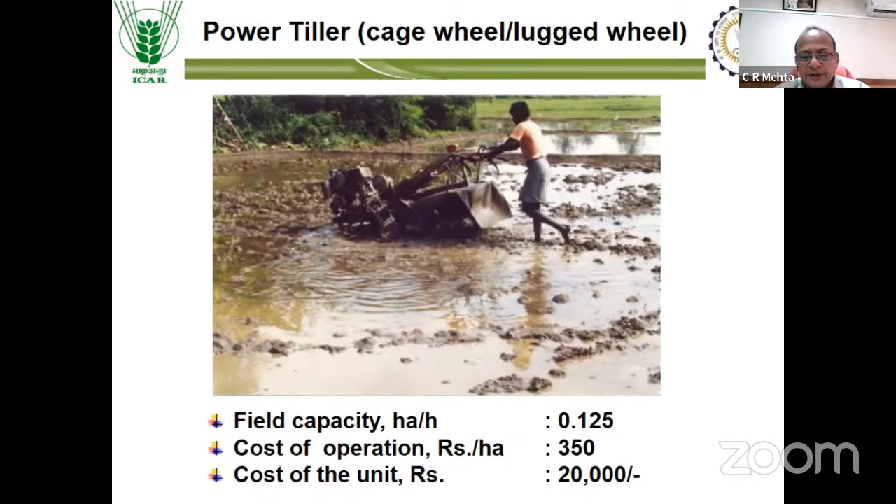Then in major parts of our country, tractor operated rotavator is used for preparation of field for transplanting of rice in lowland areas.

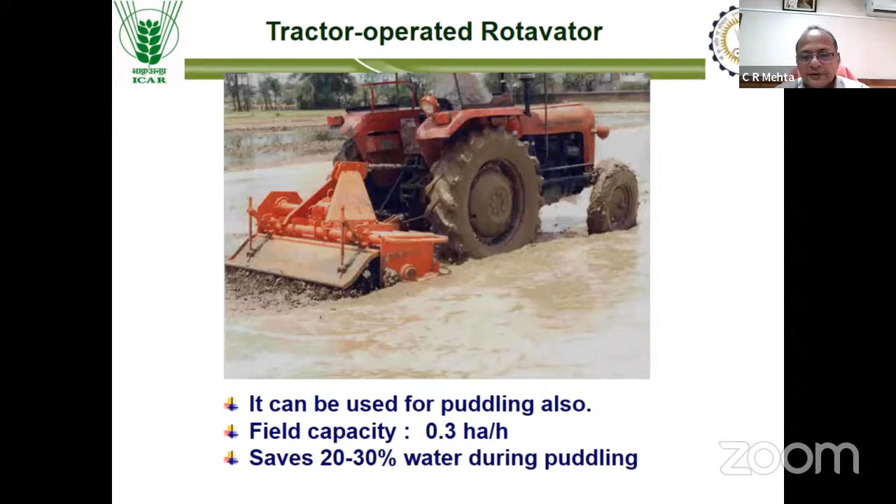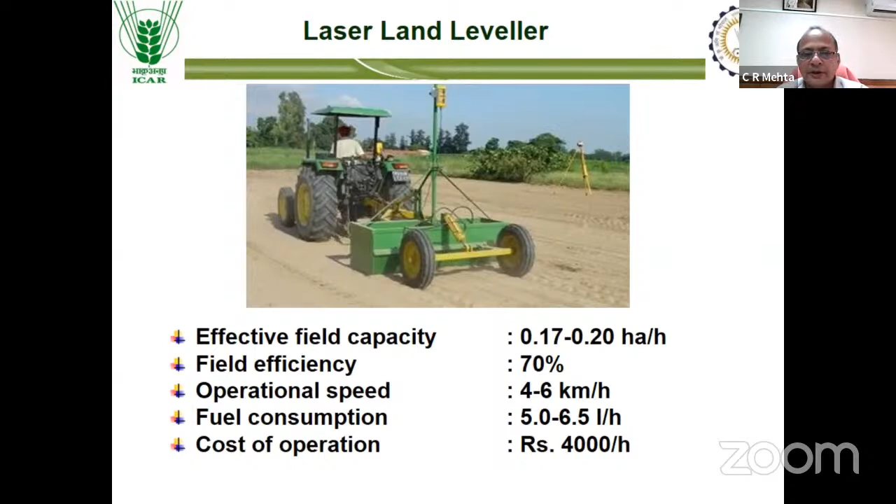Then you may have observed nowadays the use of laser guided leveler for fine leveling of rice fields. That helps in saving irrigation water by around 22 to 25%. Presently, laser guided levelers are popular particularly in the northern part of India, but slowly these are getting popular in central as well as southern parts of India also, and these are being used on a customizing basis.

Recently, we have developed the control level puddling system for puddling of rice fields. You may know that laser guided leveler is suitable for leveling of dry fields, whereas we have developed the control level puddling system for puddling of wet fields. There we are in a position to maintain the depth of puddling as well as the uniform water level in the fields, and that helps in saving irrigation water for cultivation of rice crop. Recently we have licensed this system to Farm Implements Private Limited, a Chennai-based company.

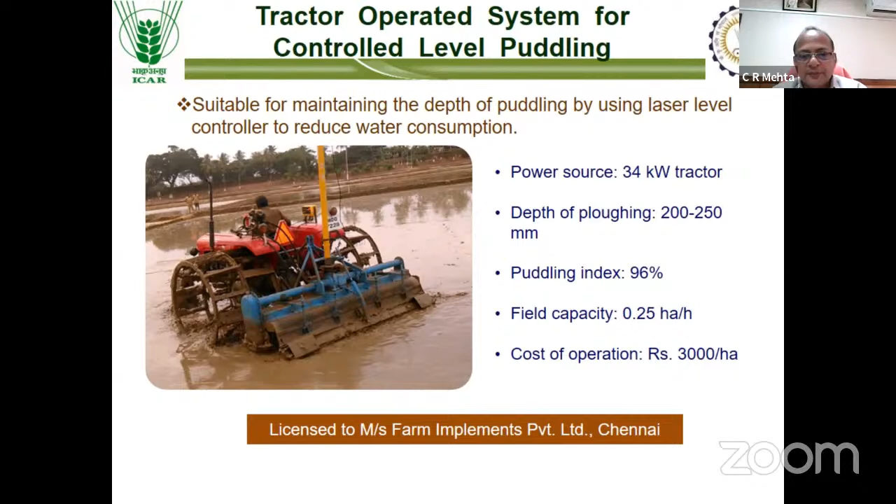Then sowing and transplanting - there are two ways of sowing or transplanting of rice crop in our country. One is dry seeding, another is transplanting of rice seedlings. So for transplanting, still in

major parts of our country, transplanting operation is done manually by women workers, and that involves lot of drudgery. To cover a hectare of an area, women had to insert their fingers in the muddy field around 1.7 lakh times, and that causes skin problems as well as having to work in bending postures, which involves a lot of drudgery. To address that, we have developed manually operated transplanters - 2-row, 3-row, and 4-row - as well as self-propelled transplanters.

So in this slide, you can see the 4-row transplanters.

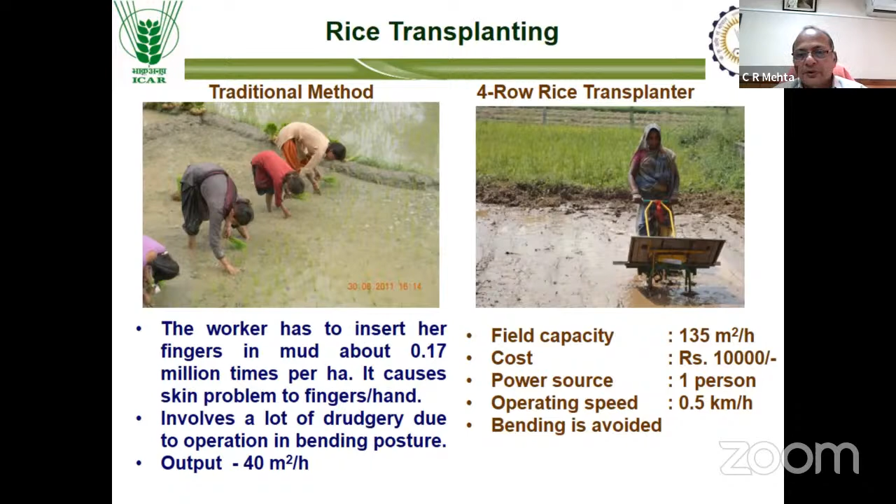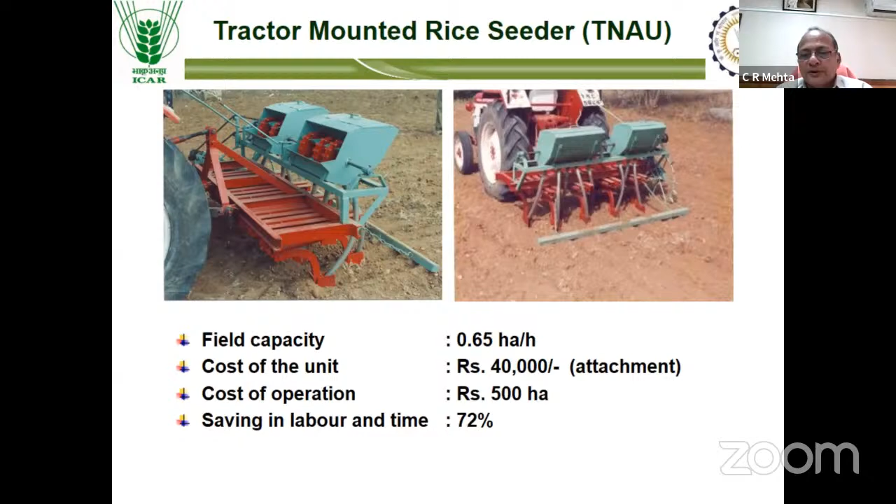For dry seeding of rice, one seeding attachment has been developed which can be mounted on the existing cultivator. It costs only around 40,000, and it has a field capacity of around 0.65 hectare per hour.

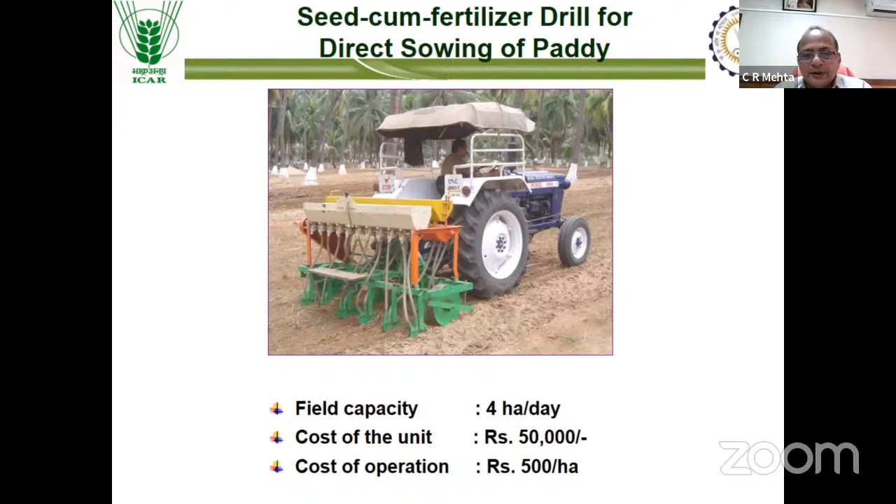You may have also heard that DSR seeders are nowadays available, and those are suitable for direct sowing of paddy. This year we have observed that around 25% of the total area in Punjab has been brought under DSR, direct seeded rice, particularly for dry cultivation, due to non-availability of labor for carrying out transplanting operations, as well as limited availability of transplanters in the state of Punjab.

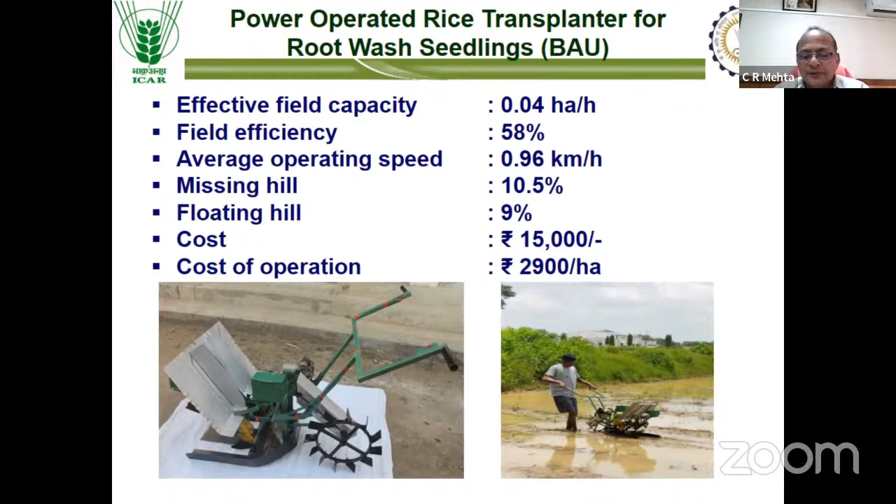Nowadays these are being imported particularly from China, and we have modified it by putting in a motor operated by a battery, so that the workers are more comfortable, because earlier that was operated by a cranking mechanism. It costs around 15,000 to 25,000.

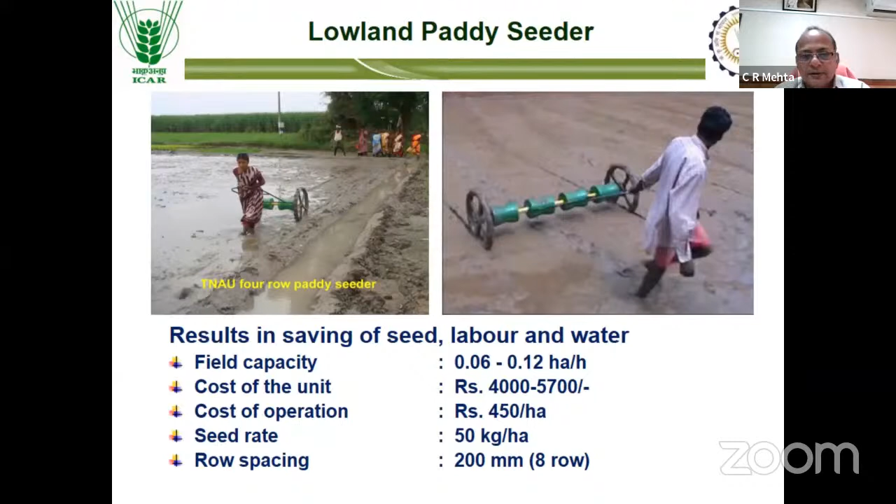Paddy drum seeders are also getting popular for sowing of pre-germinated paddy seed, and for that we have a 4-row unit suitable for operation by female workers, as well as an 8-row unit suitable for operation by male workers. Row to row spacing is maintained at around 200 millimeters, and it costs from around 4,000 to 5,700 based on the 4-row or 8-row unit.

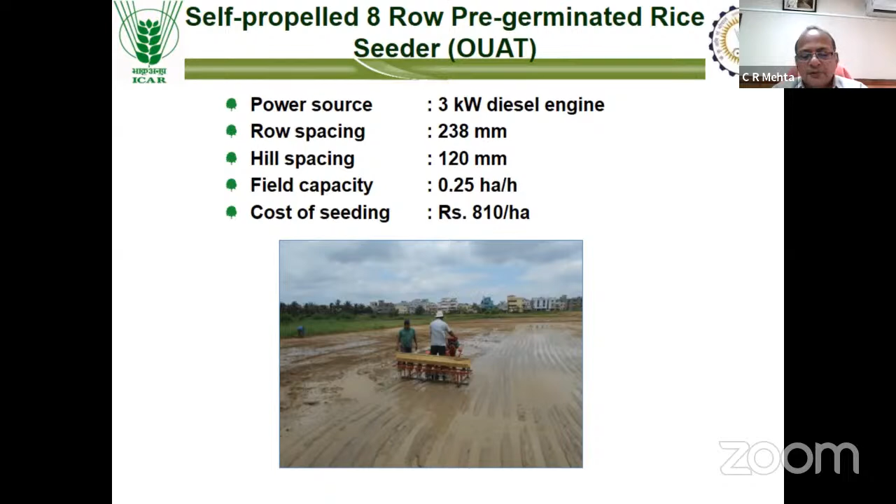Then our OUAT center has developed the pre-germinated self-propelled paddy seeder, 8-row unit, operated by a 3 kilowatt diesel engine. There we are in a position to maintain row-to-row spacing of around 240 millimeters and hill-to-hill spacing of 120 mm. It had not been commercialized - it had been recently developed and now trials are being conducted.

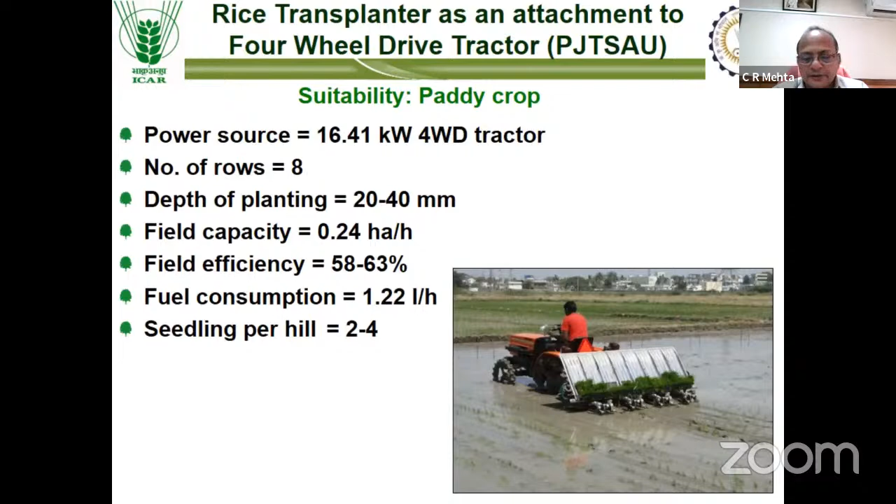These transplanters require mat type nursery, and for raising the mat type nursery, we need the rice seeder. So this is the rice seeder.

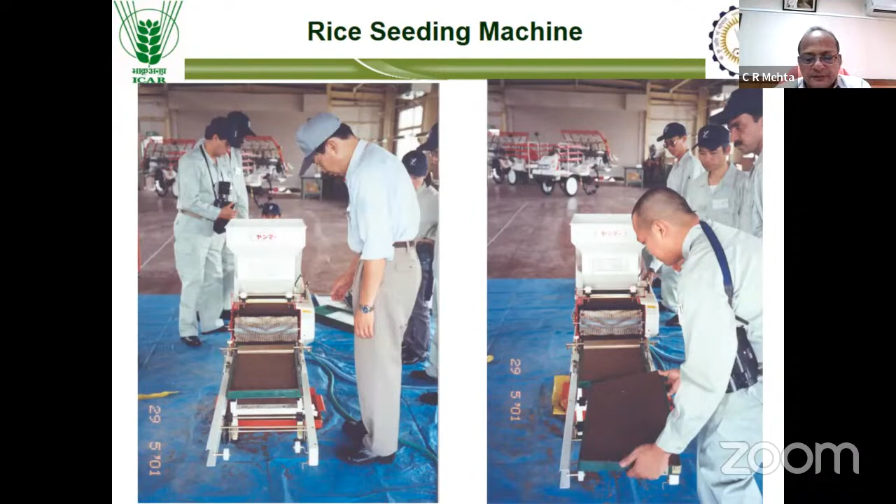Recently we have developed the tractor operated rice seeder for mat type nursery, developed by our PAU Ludhiana Center of AICRP on farm implements and machinery. This unit can carry out operations of first bed making, then laying of plastic on that bed of 1 meter, then uniformly spreading the soil on the plastic sheet, then uniformly spreading the seeds and covering those seeds also, all done simultaneously in a single operation.

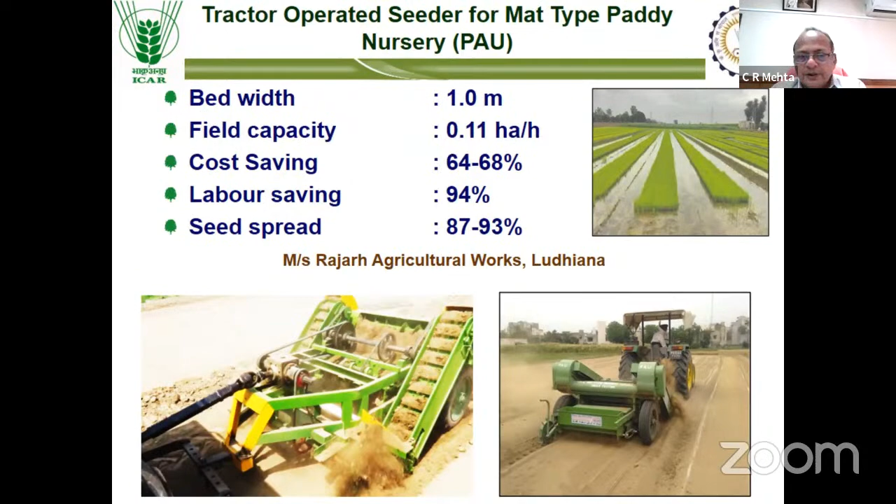It has a field capacity of 0.11 hectare, and we have also filed for patenting of this equipment. Recently we have licensed it to Messrs Rajarh Agricultural Works Limited at Ludhiana.

Here you can see the nursery required for transplanting using the rice transplanters. For that purpose, we have to grow the mat type nursery, which can be grown in trays as well as on plastic sheets.

In some parts of India, the SRI method of rice planting is also popular. For that, we have the manual marker also, and we have made an attempt to develop the SRI transplanter, but we are only partly successful in that.

Recently we have developed the remote control paddy seeder, using pelletized rice seeds which can be sown in the puddled field. That unit can be remotely controlled using a 12-volt battery.

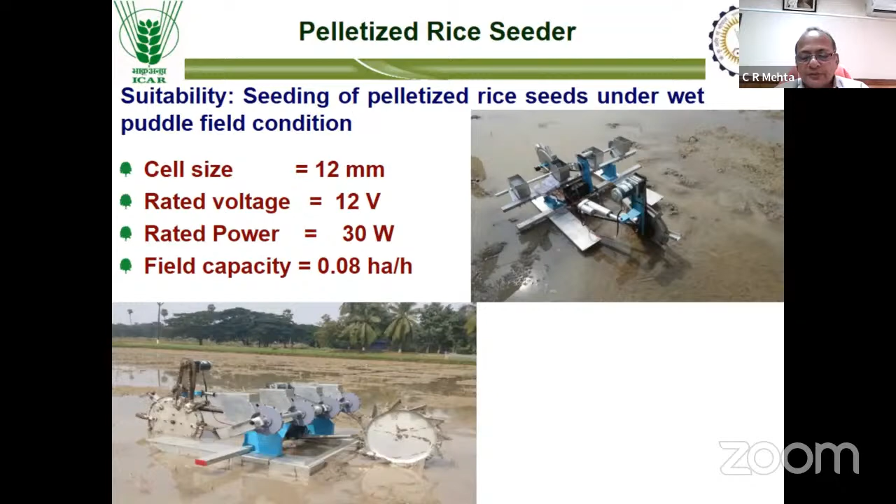It has a field capacity of around 0.08 hectare per hour, and we are making an effort to commercialize this equipment also. It reduces the drudgery of workers involved in transplanting, because it can be operated remotely from the corner of a field.

You may have also seen that nowadays remote controlled rice transplanters are being used in developed countries like China and Japan. At our regional center located at Coimbatore, we have made an attempt to develop a remote controlled rice transplanter by converting our commercially available rice transplanter so it can be remote controlled. Testing of this unit is going on at Coimbatore right now.

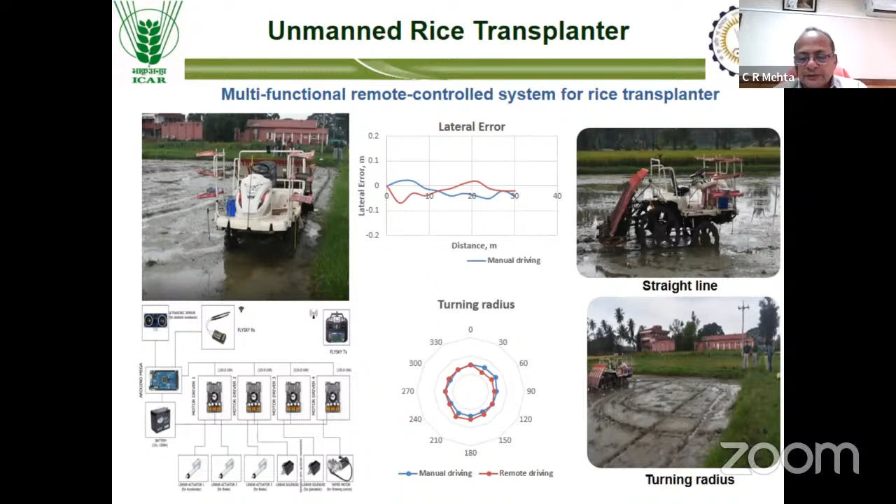If we talk about the mechanization of rice, it is not complete if we don't talk about machinery for conservation agriculture, particularly the rice-wheat cropping system followed in the northwestern part of our country.

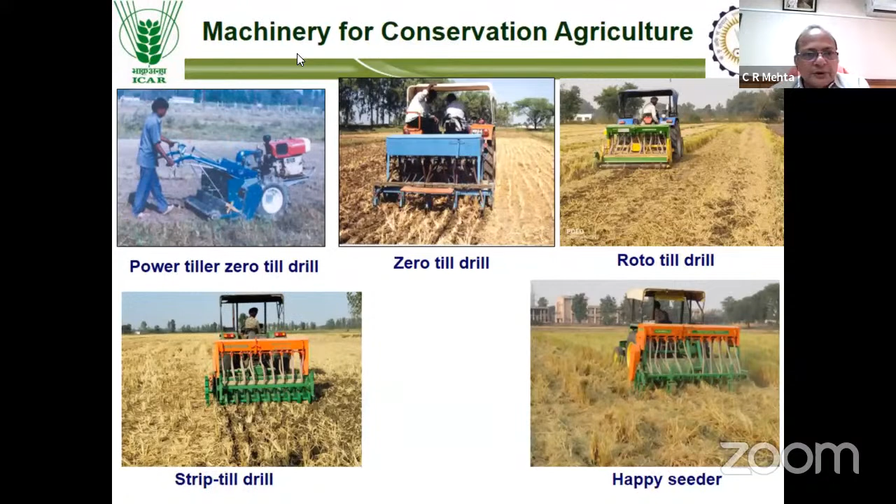After harvesting of rice, we have to sow the wheat crop, and for that also different kinds of machinery have been developed. In this slide, you can see that the power tiller operated zero till is commercially available and is nowadays being used by farmers, particularly in the eastern part of the country, such as in the state of Assam.

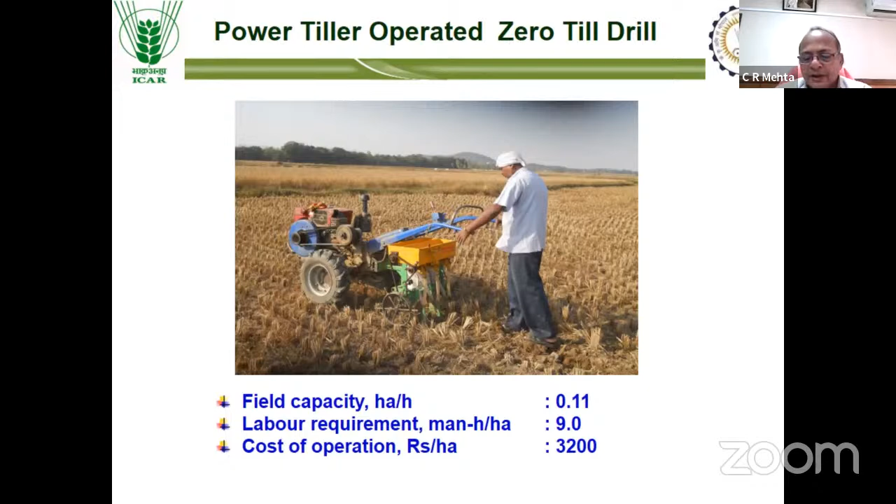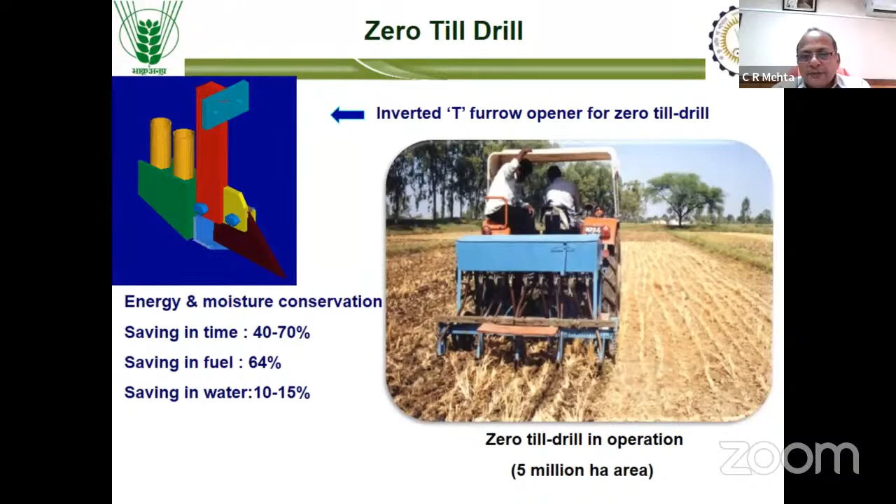I shall not go into detail of the machinery, because conservation agriculture machinery, as you are well aware, requires minimum tillage and is suitable for sowing in the residue field. This is the tractor operated zero till - it is very popular, but it requires low straw load in the field. If we have high straw load in the field, we can go for rotary till or strip till, or nowadays happy seeders as well as super seeders are also available.

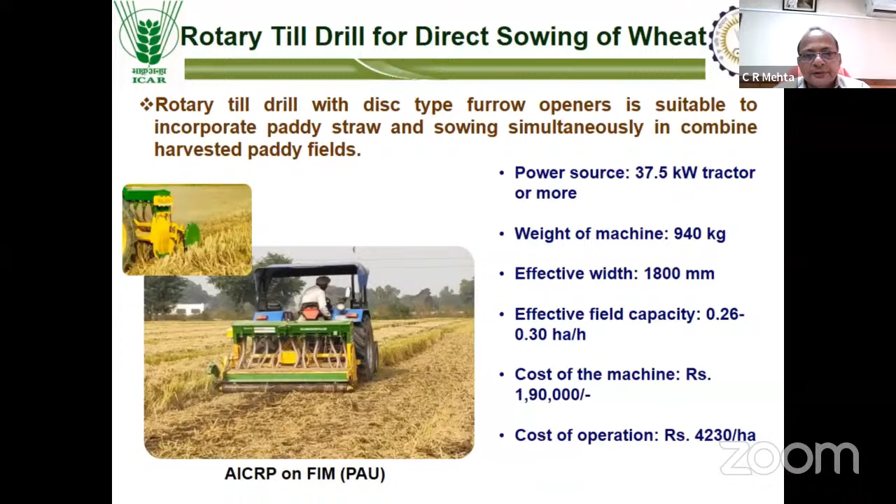We have developed different units under different projects, and nowadays a number of such machinery have already been commercialized.

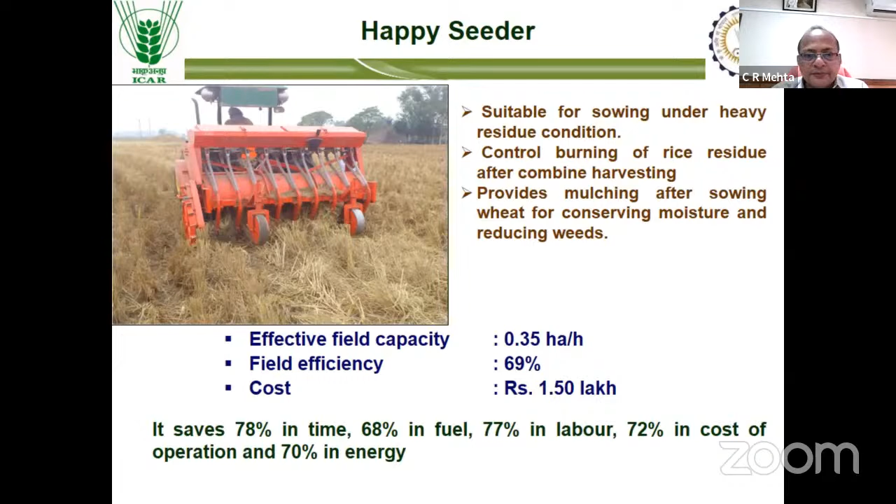In this slide, you can see the use of the happy seeder in heavy residue of rice crop, particularly for sowing of wheat crop immediately after harvesting of the rice crop. Around 4 years back, we formulated a Government of India scheme on in-situ management of crop residue. In that, our focus was mainly on promotion of the happy seeder for sowing of wheat crop after harvesting of the rice crop, which avoids the burning of crop residue in the fields.

For irrigation and fertigation also, we have come out with different systems. At our institute, we have developed an automatic irrigation system for rice crop, suitable for alternate wetting and drying methods. In that, we have a float type reed switch, so whenever the water level reaches a particular level, it gives a signal to the controller, which puts on the pump and water is irrigated to the field. Whenever the water level reaches a particular level, it automatically puts off.

We are making an effort to commercialize this unit also, and it costs around 15 to 20,000 rupees only.

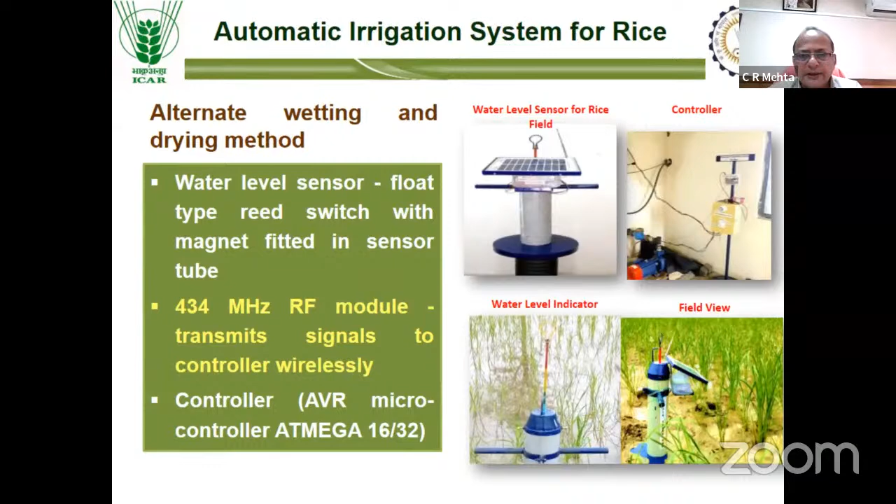We have also tried to study the thermal stress of the rice and wheat crop, and on that basis we have developed a thermal imager. Right now we are in the process of irrigation scheduling, particularly for rice and wheat crops, based on the thermal stress of these crops, which helps in saving irrigation water.

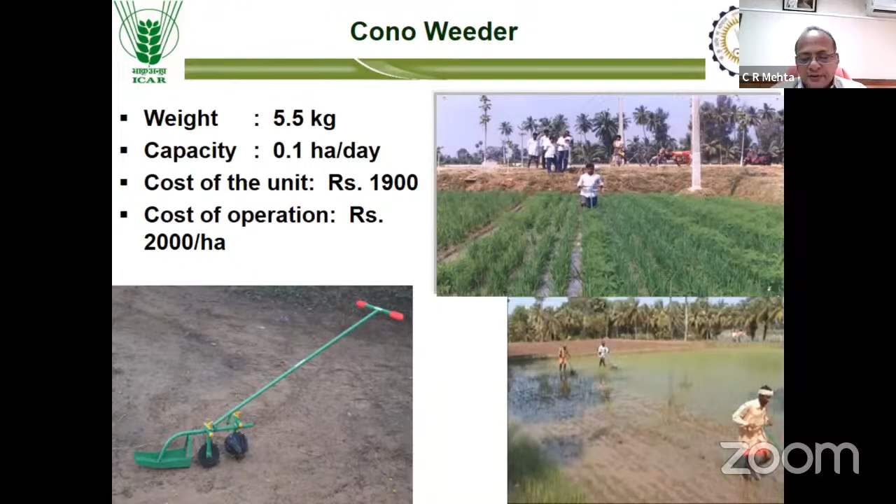For interculture and fertigation, you are well aware that the manually operated cono weeder is available and popular for interculture operation. This is a single row unit having a field capacity of around 0.1 hectare per day, and it costs around 2,000 rupees.

Then we have the 2-row finger type weeder, which is also popular in some parts of our country for interculture operation in rice crop. It has a field capacity of around 0.25 hectare per day, and it costs only around 1,000 rupees.

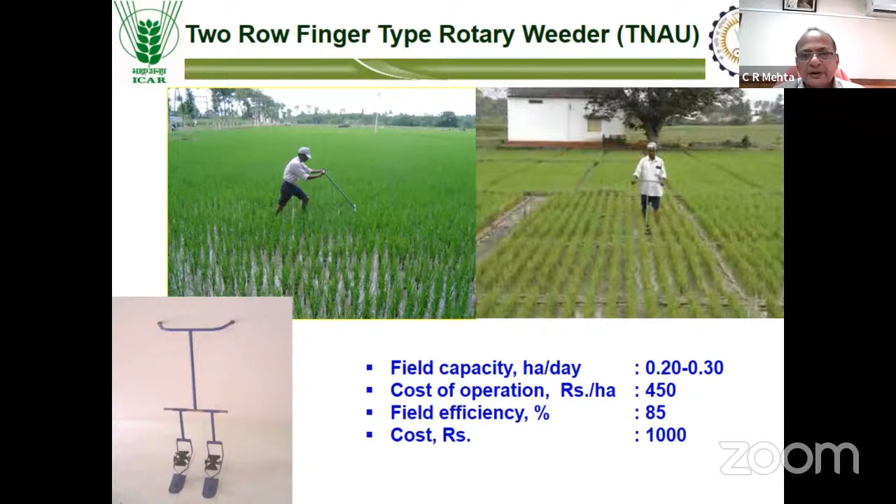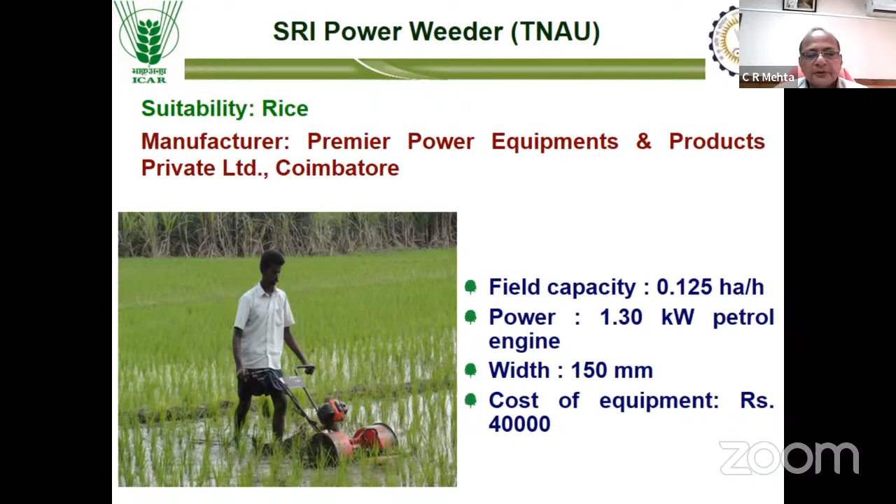Nowadays even self-propelled weeders are also available. At our TNAU Coimbatore Center of FIM, we have developed the 2-row SRI power weeder, which is suitable for weeding in rice crop, particularly rice sown using the transplanter or the DSR seeder. We have licensed this equipment, and it is available throughout the country.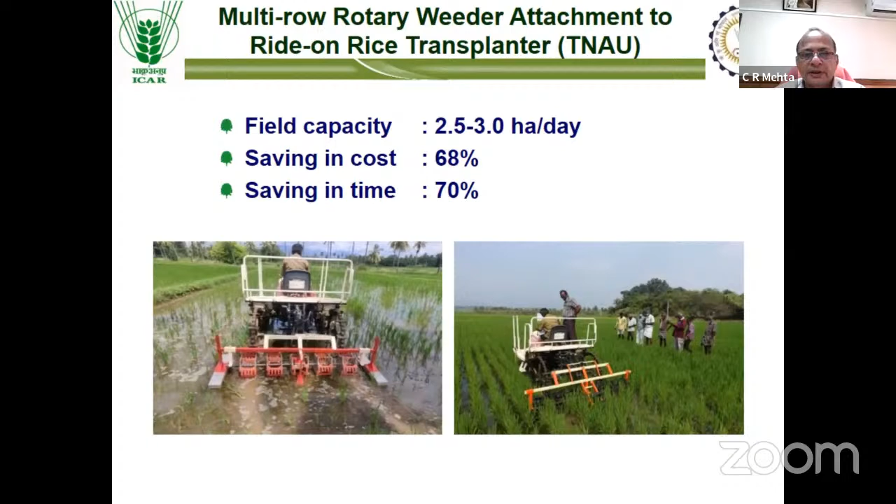Recently, on the recommendation of a regional committee related to the southern regions, there was a suggestion that we develop a weeding unit which can be attached to the existing transplanter. So we have developed this ride-on type weeding attachment for the existing transplanter, and we have tested it. It has a field capacity of around 2.5 to 3 hectares per day.

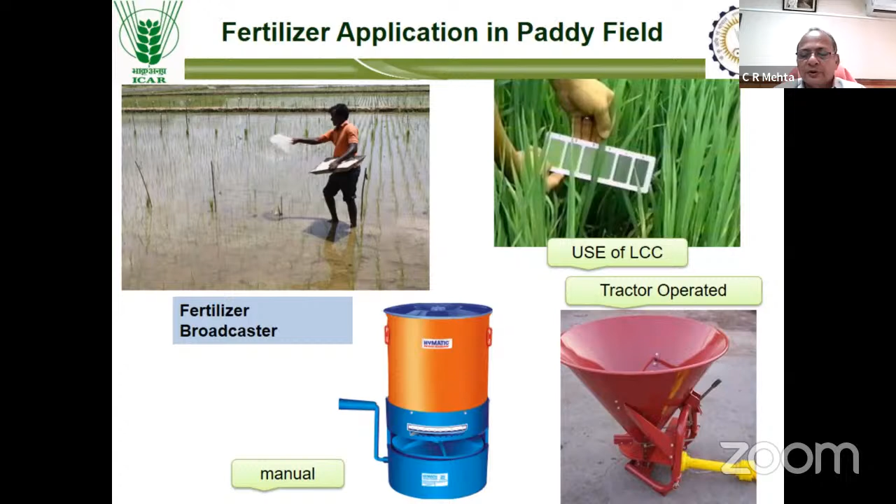For fertilizer application, in some parts of the country fertilizer is still broadcasted, even using manually operated fertilizer broadcasters. Nowadays we also have tractor-operated fertilizer broadcasters, and in some parts of the country leaf color charts are used for recommending fertilizer dosage for rice crop.

We have also developed the SPAD meter for knowing the chlorophyll content of the leaves, on the basis of which fertilizer recommendations can be given for rice crop. The SPAD meter is commercially available from companies like Minolta and costs around 1.5 lakh rupees, but we have developed our own version based on a light sensor, which costs around 3,000 to 5,000 rupees.

Recently we have licensed this to 3 manufacturers, and it can be used by KVKs to give recommendations to farmers on fertilizer dose for rice crops. We have also made an attempt to develop variable rate fertilizer applicators for rice crop based on NDVI value, and we have tested these at our institutes.

This is a 2-row unit that can apply urea at an application rate of around 19 to 65 kilograms per hectare based on the NDVI value of the crop at a particular location.

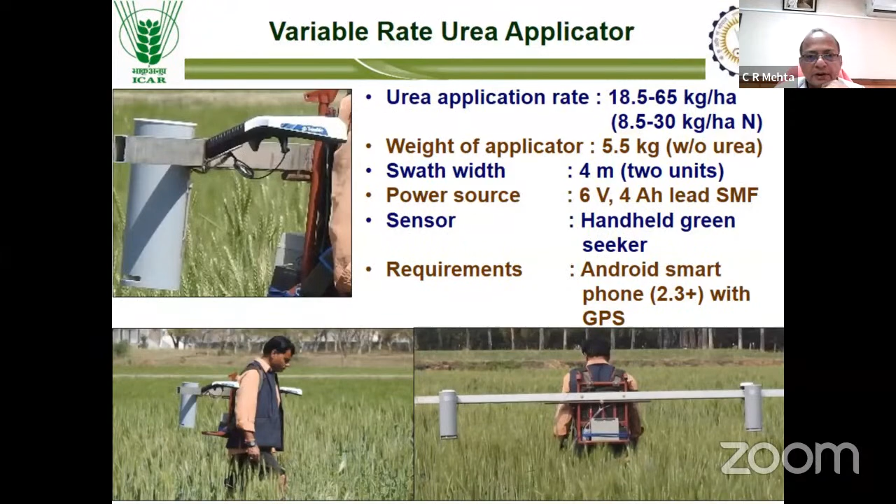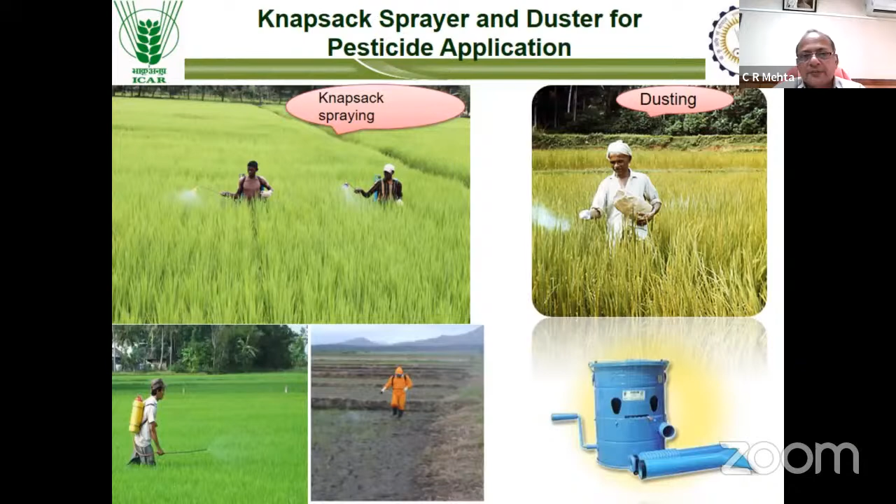For plant protection, you are well aware that manually operated knapsack sprayers are popular in our country, and dusters are also being used.

We have also developed a sowing cum herbicide applicator unit for paddy crop, developed by our Bapatla Center of AICRP on FIM. It has been tested and has a field capacity of around 0.4 hectare per hour.

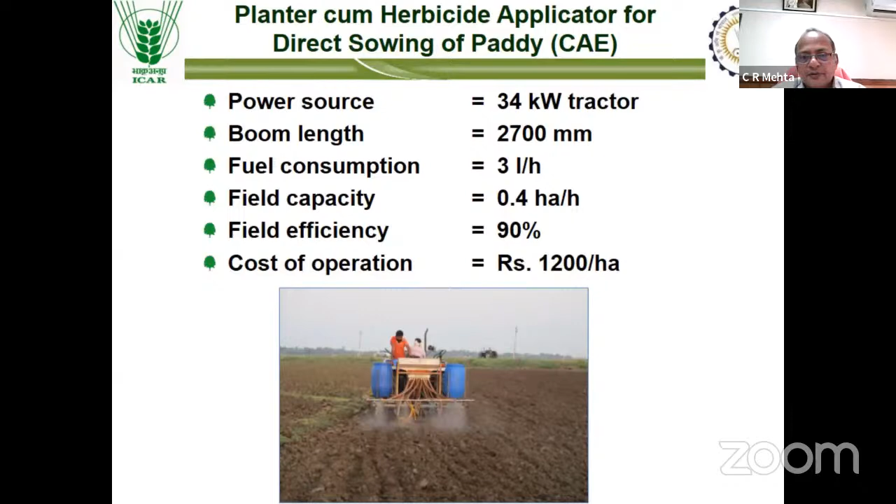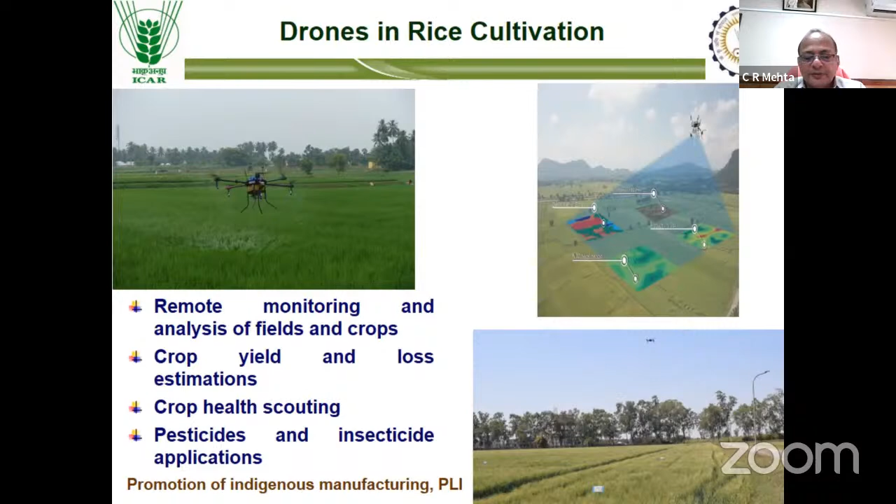Nowadays the government is promoting the use of drones in agriculture, and drones are also suitable for rice crop, particularly for spraying insecticides. On the top left hand side, you can see the drone being used for spraying insecticides. Government of India has recently come out with standard operating procedures for use of drones for spraying as well as nutrient application, and is promoting indigenous manufacturing of drones for agriculture. Drones can also be used for yield estimation in rice crops as well as remote monitoring of the crops.

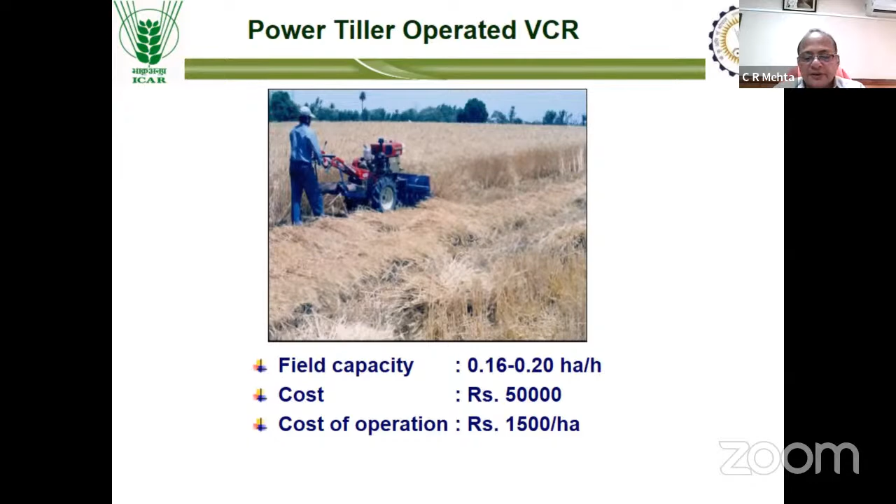For harvesting and threshing, self-propelled reapers as well as power tiller operated and tractor operated reapers are available in our country and have been commercialized. In this slide, you can see the power tiller operated reaper and self-propelled reapers, which have a field capacity of around 0.16 to 0.2 hectare per hour.

Nowadays, reaper binders are also getting popular, and they cost around 3 lakh rupees. They cut the crop and make a bundle of about 5 kg, which is dropped in the field. Self-propelled reaper binders as well as tractor-operated reaper binders are getting popular in our country. Self-propelled reaper binders have a field capacity of around 0.2 to 0.25 hectare per hour, while tractor-operated reaper binders have a field capacity of around 0.6 to 0.8 hectare per hour.

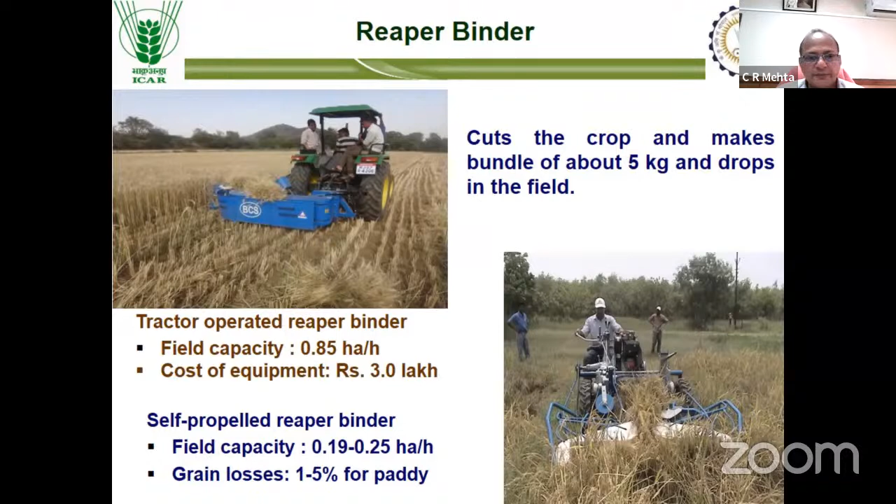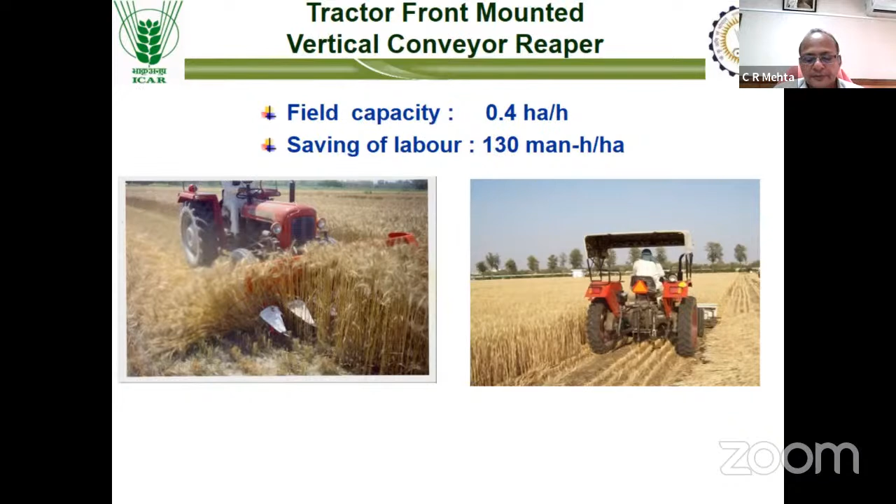Vertical conveyor reapers are also available for harvesting of rice crop, and those can be mounted at the front of the tractor.

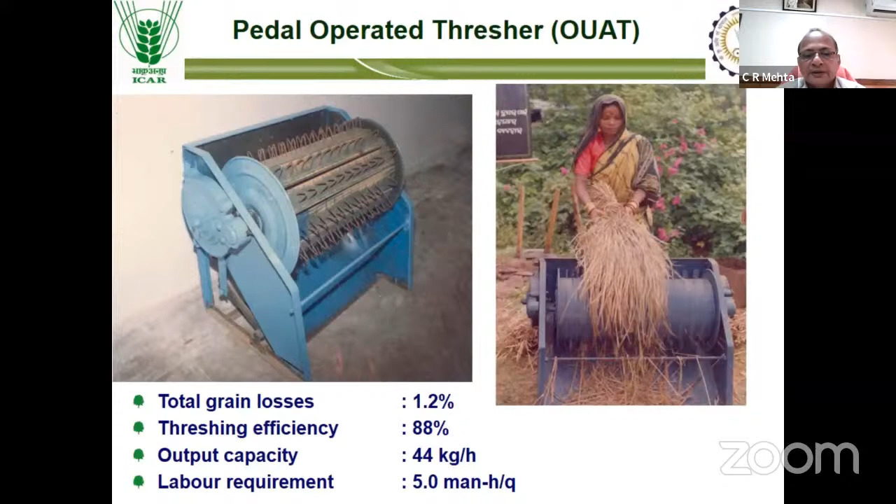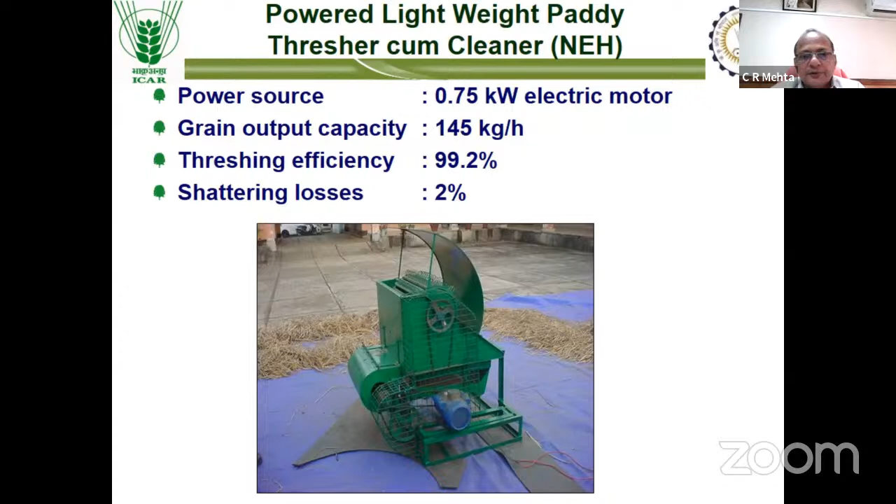Manually operated winnowers are also available, and nowadays motor operated or even power tiller operated winnowers are also available. Particularly in the eastern part of the country, pedal operated paddy threshers are getting popular, to be operated by women workers, and we have redesigned it based on ergonomic considerations for women workers. Nowadays, even motor operated, electricity-based threshers are also available. For northeastern and hilly regions, we have developed a thresher-cum-cleaner for paddy crop, which is power operated.

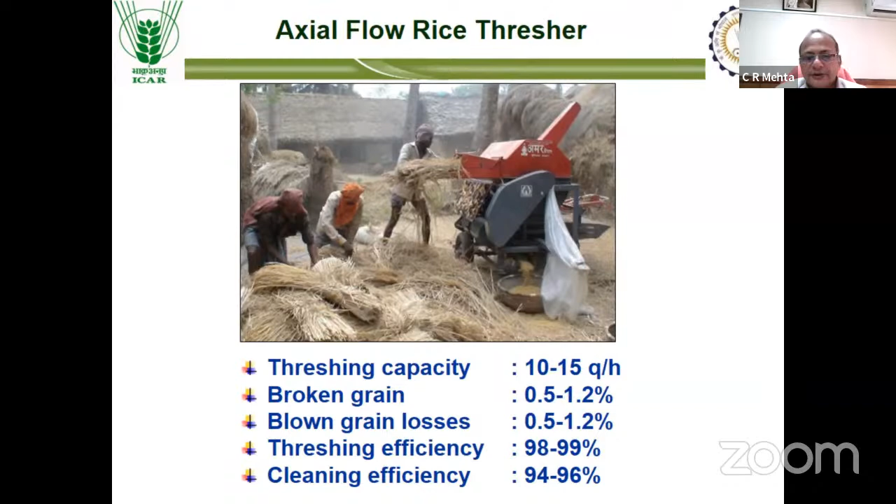Tractor operated higher capacity threshers are also available, based on axial flow principles, and those are commercially available and used on a custom hiring basis throughout the country. Those have a capacity from 10 to 15 quintal per hour.

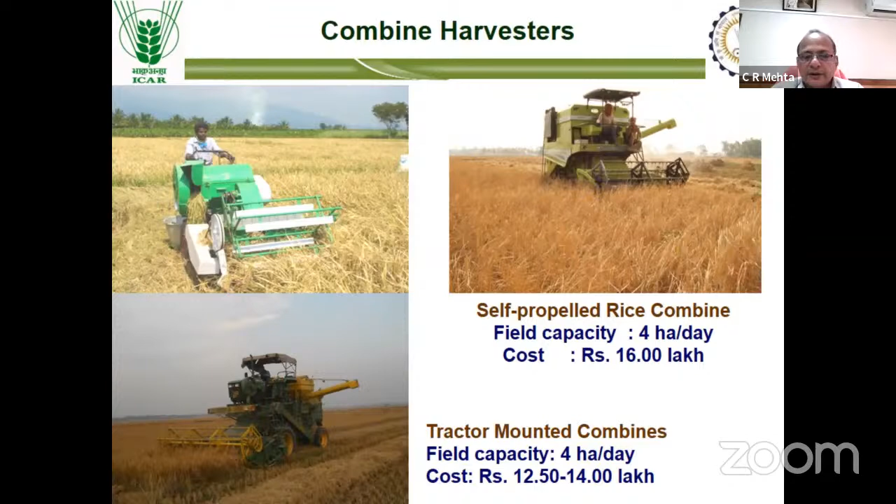For harvesting and threshing, combines are also nowadays available. Even small combines are being introduced in our country, but those are not so popular. Nowadays, particularly self-propelled combines, as well as tractor mounted combines, are used. Tractor mounted combines are popular in the southern part of the country and are used on a custom hiring basis there, whereas self-propelled rice combines are popular in the eastern part as well as the northern part of our country.

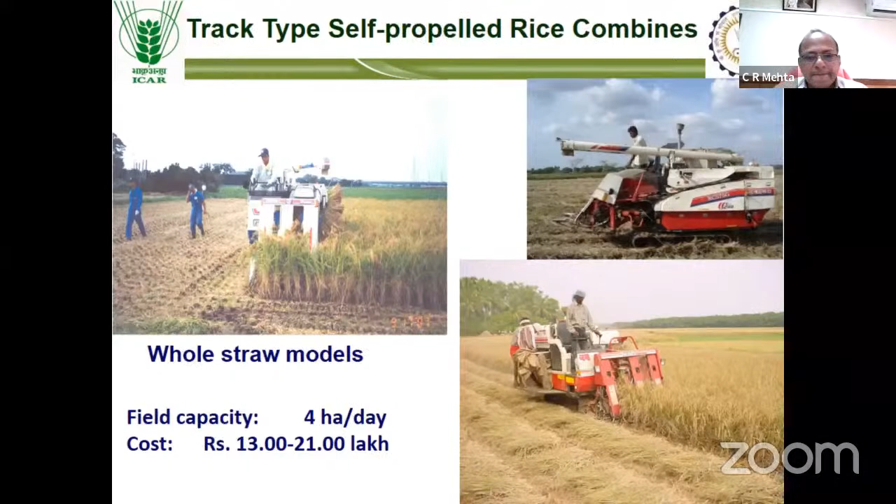Farmers also want to have the complete straw, and for that purpose, head feed combines are also nowadays getting popular, but those are costly, costing around 13 to 21 lakhs, and have a field capacity of around 4 hectares per day.

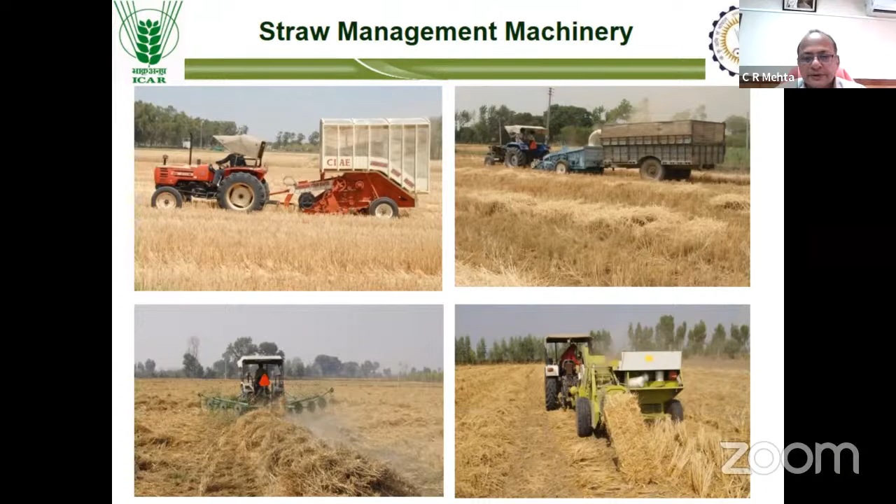For collection of rice straw, balers are available, and that straw can be converted into bales for use in other industries, or those bales can be stored for feeding animals during the off season. Rakes as well as rectangular balers are popular in northern parts, whereas round balers are popular in southern parts and are of less cost. Nowadays there are a number of manufacturers of such balers in the northern as well as southern parts of our country.

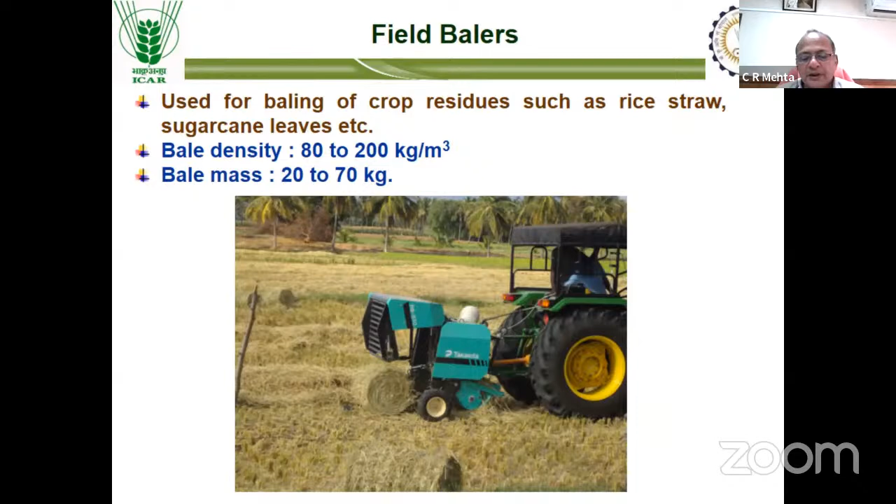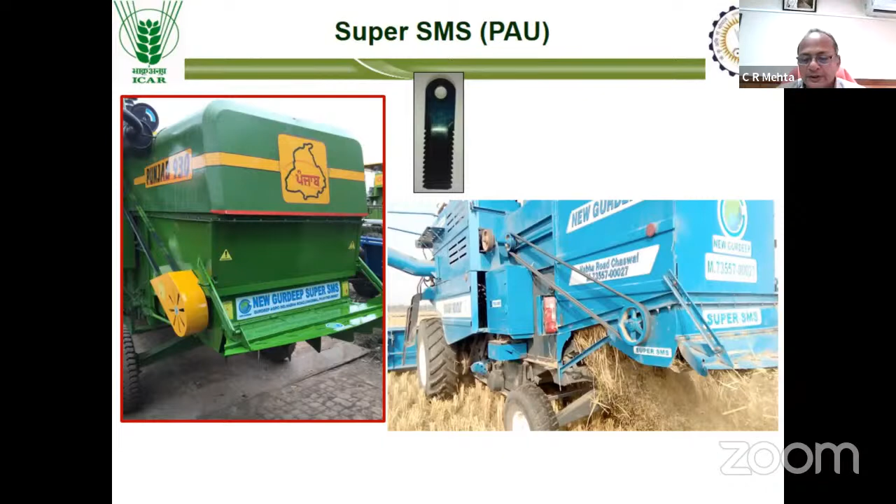Particularly to avoid the burning of crop residue, whenever rice crop is harvested in the northern part of India, the government has made it mandatory that the combine should be provided with a super SMS system. So whatever straw comes out of the combine is chopped and uniformly spread throughout the working width of the combine, so that a happy seeder can immediately follow for sowing of the next crop of wheat.

In the end, I can conclude that there is a need for full crop mechanization of rice, and particularly for rice production, mechanization machinery is available. Those are being used in some parts of the country, and there is a need for mechanization of different operations, particularly transplanting and interculture, throughout the country. The cost of machinery used for rice cultivation, like rice transplanters and combines, is high, so those are to be promoted on a custom hiring basis or on contractual field operations. Also, there is need for assured mechanized services to farmers for such machinery, and entrepreneurs also need assured service business for providing such machinery.

I suggest that for rice transplanters, seedlings should also be provided by entrepreneurs, so farmers may not have to grow seedlings themselves and can instead hire the services. Such a system is popular in Japan, where cooperative societies provide rice seedlings of different varieties.